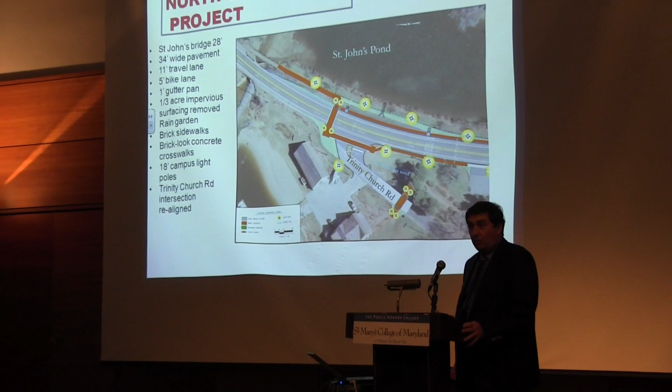Currently, we opened bids in December and had a good array of bidders. WM Davis up in Leonardtown is the low bidder, and we're now just waiting for the State Highway Administration to give us permission to go ahead and award the contract. So this is what we bid, and I'll go through it quickly with you.

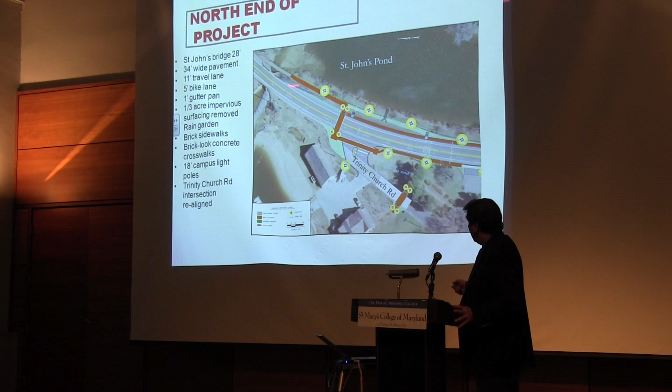This is St. John's Pond and Route 5, where St. John's Pond goes under the road out to the river. And there's the rowing house and the boathouse, River Center.

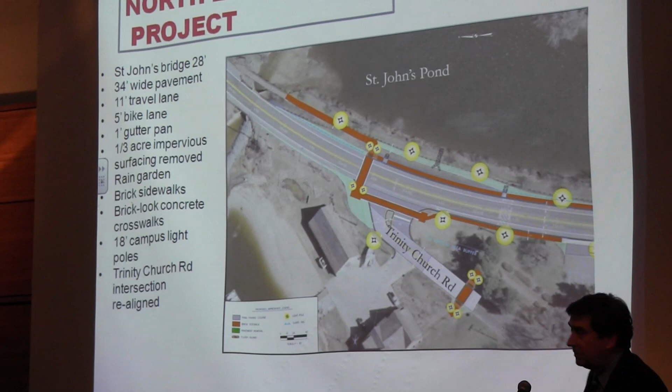We will be moving the existing crosswalk that's down by the statue. That's going to go away completely and move up to this intersection, where people are crossing anyway. We'll have a new sidewalk connecting to our footbridge right here at St. John's Pond, with sidewalks running down both sides of the road.

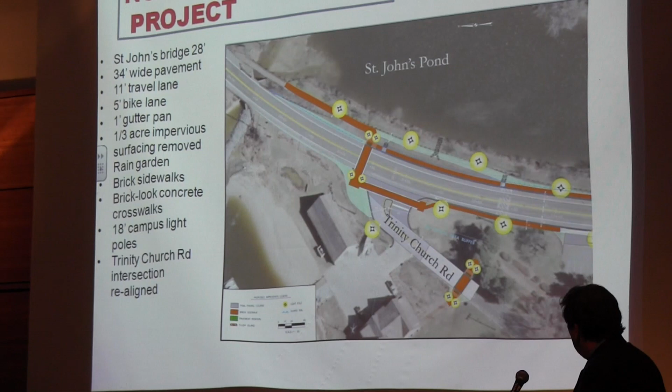The yellow dots are street lights, like our campus standard light poles you see, but taller—about 18 feet and quite a bit brighter. These are designed for streets, not for sidewalks.

Right here, we're going to realign Trinity Church Road. So right now, Trinity Church Road kind of follows where this light green is. If you're coming from the northbound, it's kind of like an exit ramp onto Trinity Church Road. You don't really have to slow down. You can just go whipping down that road at a high rate of speed.

And of course, we have no sidewalks on this road as of yet. We do have plans in the far future to try and do that, but not quite yet. So we're going to realign this road so that it actually turns, and we'll have like a 90-degree intersection. That also will allow cars who want to come down Trinity Church Road to make a right-hand turn safely.

Right now, you're at such an acute angle that if you have a larger vehicle, you're turning into the oncoming lane of traffic to make that turn. So this will eliminate that.

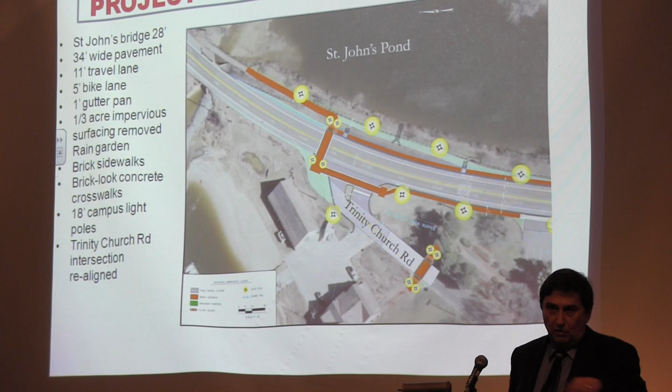There's another crosswalk there, and there's a small mountable island, so it's not a hard curb. A large truck, like a big charter bus, could literally drive on top of that — kind of like you see at the circles, the rotaries in the county, where it's not a hard curb, it's a mountable curb. So the fire department asked for that, and we made sure that they got that.

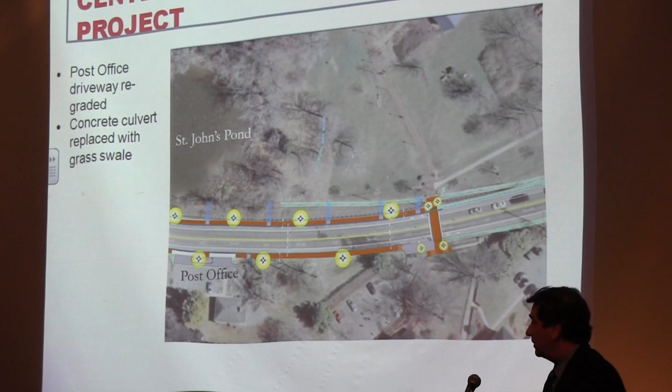And then this is the crosswalk up at the River Center. Right here is the entrance to the post office. So the sidewalk goes across, and it'll all be ADA, with curb cuts and everything, and it continues down to the main crosswalk right here.

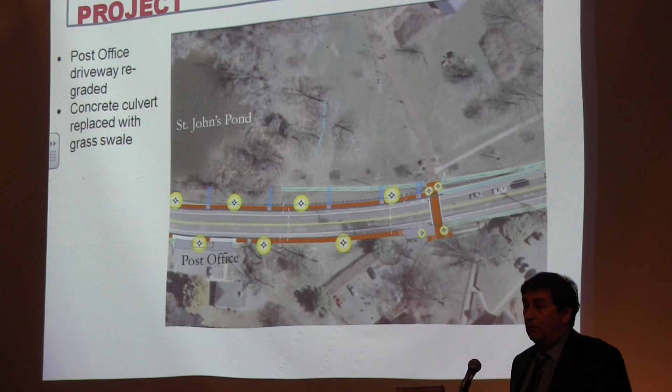Originally we were going to do these with real brick, and SHA said no, that would be too much maintenance. So then we went to stamped concrete, and that was too expensive. So now it's stamped asphalt. It will still look like brick, similar to what's over in Solomon's near the Marine Museum, where it looks like brick, but it's really not.

And the road doesn't narrow, by the way, just so you know. The drivable lanes today are 12 feet wide, and they will remain 12 feet wide. We're not playing with the drivable lanes.

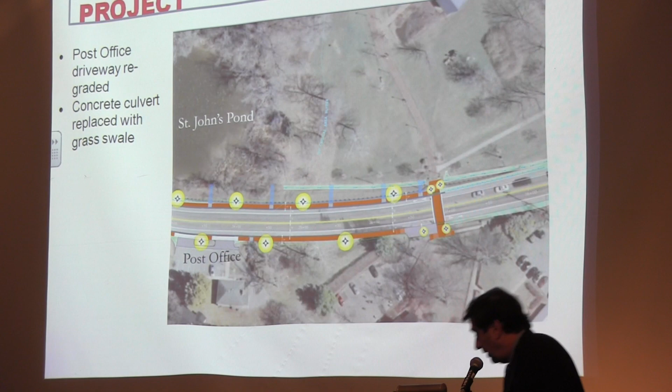The sidewalk goes where the shoulders are now. So you have a 12-foot lane right now and like a 9-foot shoulder. What we'll end up with is a 12-foot lane, a 4-foot bike lane shoulder, and a 5-foot sidewalk with curb. As you go further south past the crosswalk, where it's green, that's where we'll cut the shoulder back some to eliminate some of the hard surface for environmental reasons.

And you know that big giant concrete swale on that side of the road, where if you drove off your car would be like this — that gets filled in and becomes much more... it's still a swale for drainage, but it's not big concrete, it's all grass and it leads down.

And then this is the existing Campus Center Drive, so this is where the project will terminate. And as you've probably seen, and we'll talk about this in a second, the new driveway is going to be up here.

So that's phase one. Does anybody have any questions about phase one before I go to phase two?

Yes, sir. Tell us something about the lights on the road there, the yellow spots. Are they focused downward?

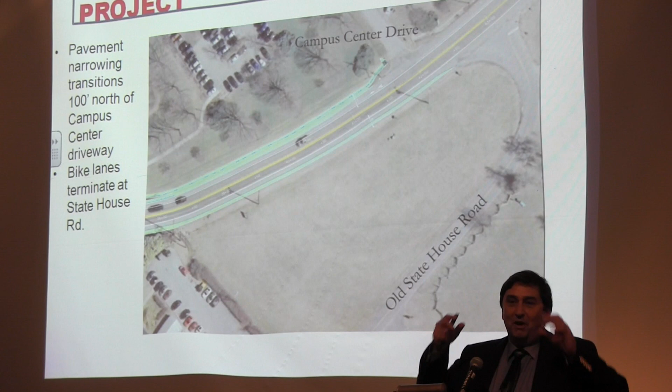Yes, these lights are not the light pollution type lights. There's a cap on top, and the light is high pressure sodium vapor — not the low pressure sodium, which are the bright orange ones. These are the ones SHA typically uses on their highways. They use that particular tint because it provides the highest level of definition. When you go to the really bright white ones — same as people who hunt wearing those yellow glasses, because it gives them better black and white definition — these lights have a slight tint to them, but not that yellow-orange light.

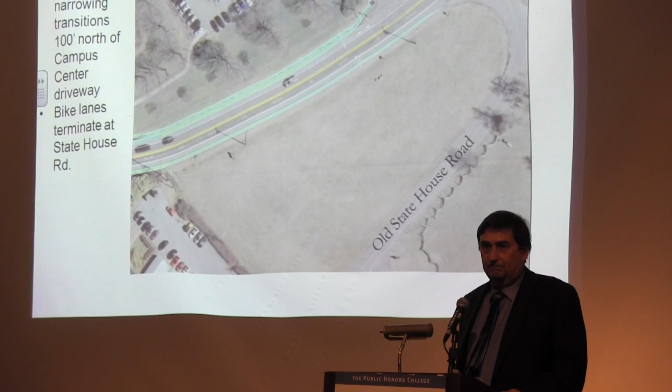Yes, sir, just to clarify — the bike lanes will be taking over the shoulder, is that correct? Yes, whereas now it's approximately a 9-foot wide shoulder, that becomes 4 feet of bike lane and 5 feet of sidewalk.

Why is the Campus Center Drive being moved? Is it to line up with something? Well, we'll go through that. Can I hold off on that until we get to the parking lot, because I'm going to talk about the parking lot.

Any lessons learned why that might have been a concrete culvert to start with, like erosion? Well, probably was, I mean, absolutely. That was built back, don't quote me, like 1930.

When they were having the tricentennial for St. Mary's City, they built a bypass, Trinity Church Road. That was Route 5 through the city of St. Mary's, and they built the bypass, if you can imagine such a thing, around St. Mary's City. In those days, nobody cared about runoff into the rivers and the bays, so they just put in a hard concrete swale, inexpensive construction, served the purpose.

And there's all kinds of, along that road over time, you can see where there are drainage ditches from catching rain, and culverts and other parts of the road, with pipes coming underneath the road that go right into that ditch.

Seems like there's probably a lot of water that runs down that, from Lawrenceville or whatever road, and it's fairly steep there, so would it be causing an erosion problem without the concrete liner? That's what I'm getting at. Yeah, I understand it's more natural to have grass filtering and all that if it's not eroding.

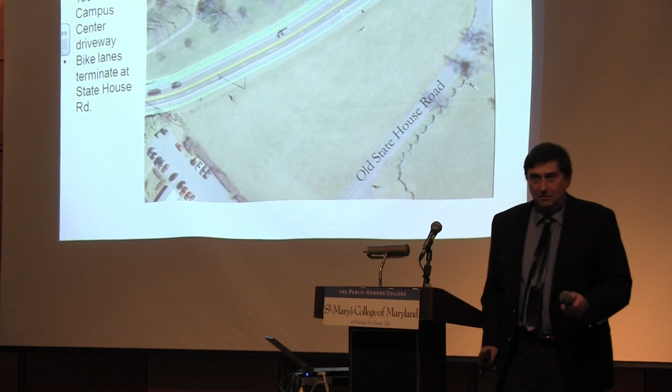Could I just ask the cameraman, can you hear the questions that they're asking? I can hear the questions, but if the microphone could be passed around, that would be ideal. Oh, okay, yeah, I could repeat the question. That would be easier, or Lisa's got a microphone in the back — this is our first time doing this videotaping.

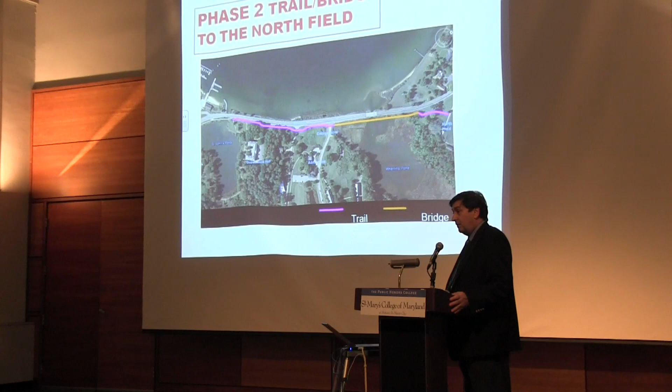Any other questions? I'll go on to phase 2, which is just one slide, but I'm really happy to announce that we applied for and received a grant, a federal grant through State Highway Administration. It's called a Transportation Alternative Program Grant, or TAP grant, to construct the second phase of traffic calming, which is a bicycle pedestrian trail that will go from St. John's Pond all the way up to the North Field, with about a 700-foot bridge that has to cross Fisher's Creek and the marsh area.

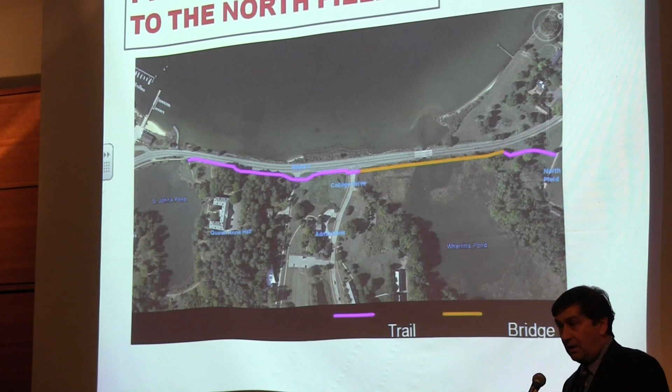Now, this will not have any effect whatsoever in terms of doing anything to the road. We're not touching it — this is all going to be on college property. But our biggest concern is that this whole stretch of road has no pedestrian or bicycle pathways, and right now when you get to this particular box culvert, it's not wide, less than 18 inches. So we have a lot of our students, and me at lunchtime, going up this way and dodging the traffic. So that's the goal here, is to get pedestrians off of that road.

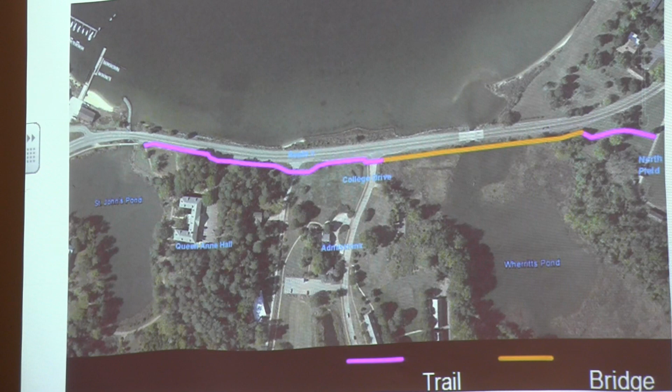So this is a $1.7 million grant, and we have to put a $435,000 match to it, so it's a total of about a $2.2 million project.

Well, the design is already 30% done. We had to do the design to 30% in order to apply for the grant. So we're at that point, and we'll be finishing the design this summer, and then construction we hope to be in the next construction cycle, next spring and summer.

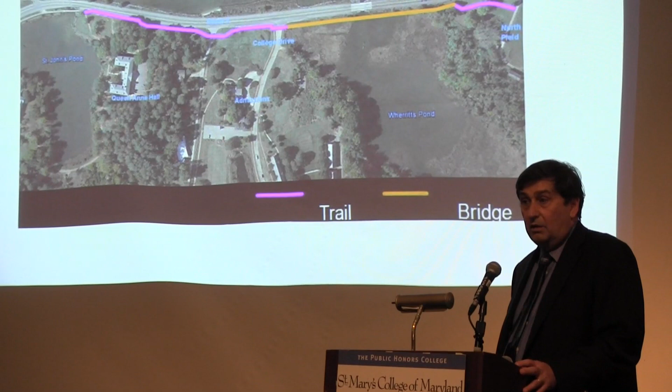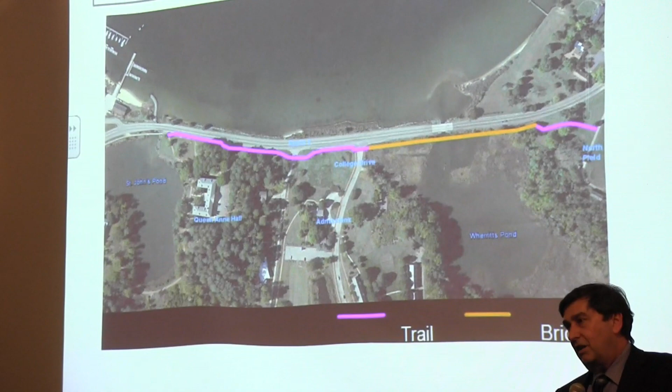Archaeology, we've worked closely with Gina Fodden's group from the city on this. The only place where we're a little concerned about archaeology is up here on the North Field where the old sites are. So we probably will not do this exact path, we'll probably try and come this way. We always try to route our sidewalks in archaeological areas so they're built up on top, where we're not cutting into the ground, so the archaeology underneath is actually protected.

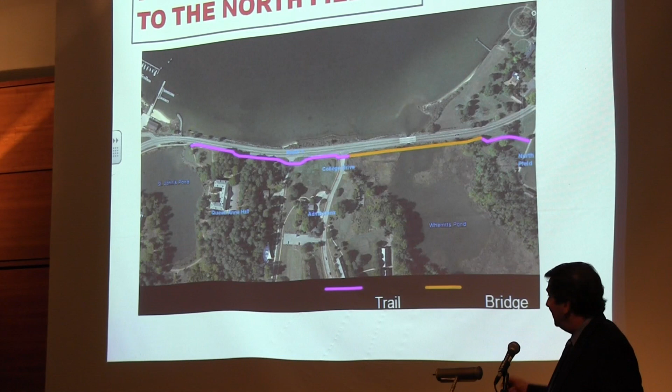Any questions on that? Yes sir, the pedestrian bridge at the traffic bridge, is it the same clearance height underneath? We're not at that level, it'll actually probably be higher, I think because of storm surge. There's another issue we have to consider, which is boat and kayak access. You'll be able to get kayaks, whatever you can get under this culvert, you'll get under that bridge without any problems.

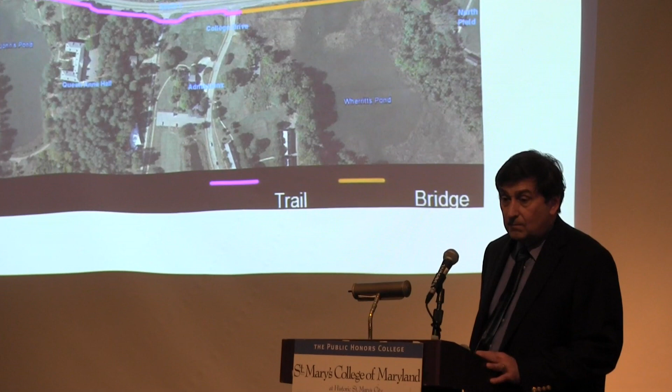So the $1 million federal grant has been used for phase one, and that's already in place. Phase two would be a combination of a state grant and a match. Who's doing the match? It'll come from other than federal funds. The college is prepared to match, and we're looking into seeing if we can do it through state funding.

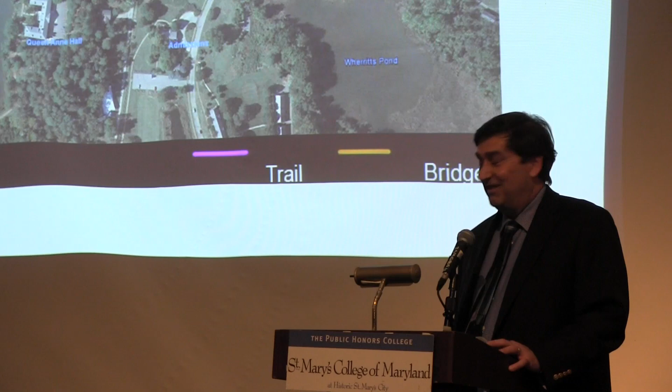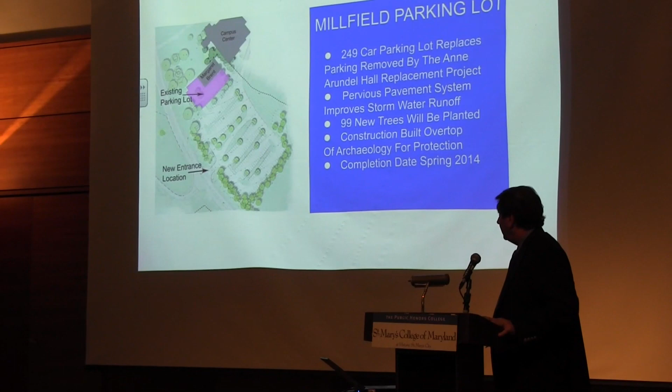Any other questions? Okay, then I'll move to the next project. So this is our Anne Arundel Hall project. The Millfield parking lot is part of the initial phase. We did the parking lot and the demolition of the building. Right now you see this is phase one from this line going this way, so this is all phase one right in here. Then this will be phase two, and this is the existing parking lot that's in purple.

Right now we're just waiting for the weather to break. It's taken a long time, it's all weather at this point, we're just waiting for asphalt to open up. It's not been a kind winter. We've had so many nice winters the last few years, and the winter we picked to do this has not turned out well. So as soon as we get that done, we're ready to go.

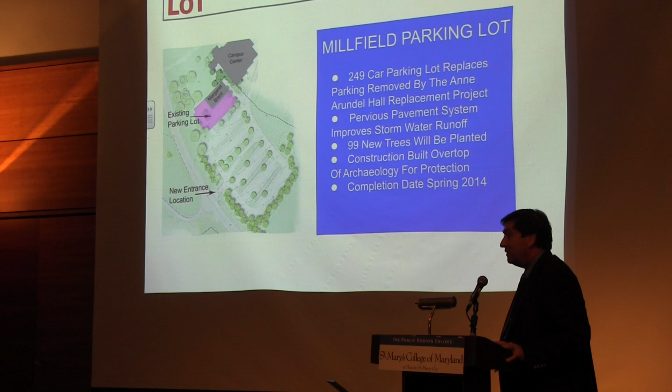This parking lot, now this moves, Ingrid, to your question, the entrance moves to line up with State House Road so that we'll have a true four-way intersection, so you don't have this stagger where right now you have people trying to drive around, people making a left turn, and then somebody making a right turn 50 feet down the road, and it's just not a good setup.

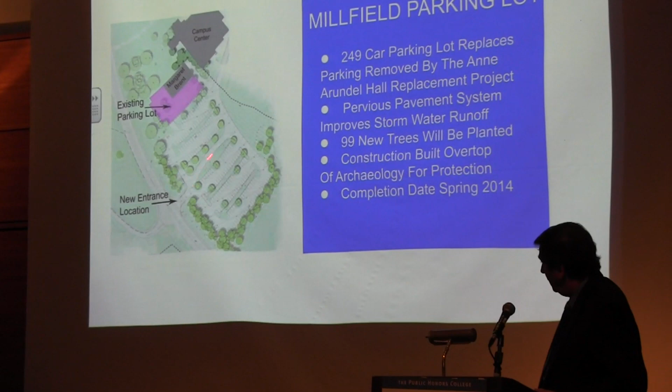This was also designed so that, right now, if you've ever watched our large 18-wheel trucks bringing food to the campus center, they kind of stop in the middle of the road and slowly stop all the traffic and back up down the road. So now they can pull straight in, there's a curve in this part of the driveway, it curves around this way, so they can pull in headwise up to here and then back down into the loading dock from there. So it was designed that way.

So it will be well landscaped with trees around it. The archaeology team has worked closely with us on this, so again, many thanks to St. Mary's City. This is actually on the city's property, this parking lot.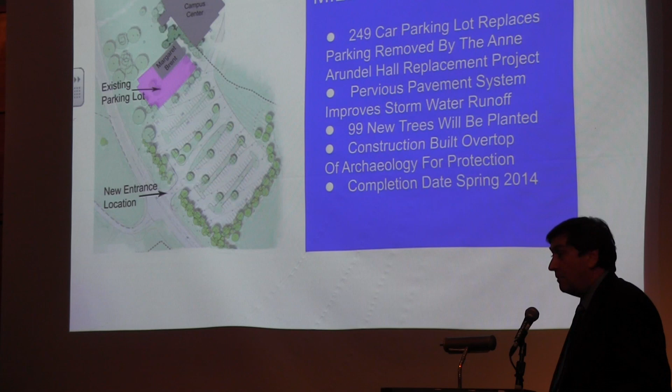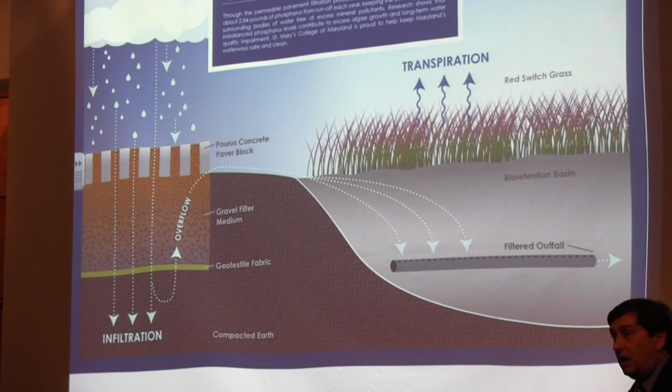And it's a pervious pavement, which means, here's a quick diagram. These are those concrete paver blocks you've seen, they kind of open up and they're filled with gravel. So the rain comes down, and hopefully if it's a light rain, it infiltrates into the ground and Mother Nature does its thing. If it overflows, it runs down, the parking lot slopes down and it will run down into, and it's bisected by...

bioretention swales or basins. So the runoff would run into those swales, which have a special permeable soil in them, so the water goes in, and either through transpiration with the grasses that are there, or through the ground below, it can infiltrate there. If it gets to the point where it's really saturated, it can go out through an outfall pipe, and by now it's filtered water, so it's removed the phosphorus, and you have clean water going into the St. Mary's River shed.

So any questions on our parking lot? What does the geotextile fabric do?

That's there to separate, the city actually asked for that. It doesn't do anything from an engineering standpoint. Water will flow through it, but it was done.

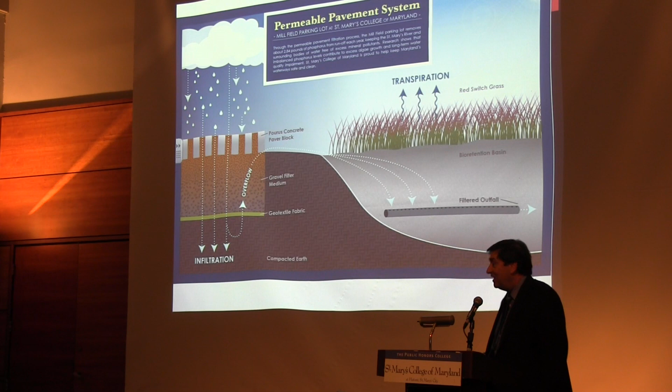This parking lot is unusual if you're in engineering. Normally, if you were going to build a parking lot, you'd go out there and strip off all the topsoil and top layers of dirt to get good soil, and then you'd build. Well, that would get into the archaeology. So we went out there, and other than giving it a good haircut, mowing the grass way down, we put the geotextile fabric right on top of the dirt and built.

It also helps keep this special medium, the filter, where it belongs, so it's not sinking in if you have soft spots.

Was it to identify the layers where the fill stopped on this project? Was that part of the textile? I believe so. The archaeologists asked for it, I think, so they can tell in the future. It's pretty obvious whether they had it or not, because this is obviously imported material. When they're out there, it's amazing how they can look at the earth - to me it looks like dirt, but they look at it and it's like, oh no, that's 300-year-old dirt versus 50-year-old dirt.

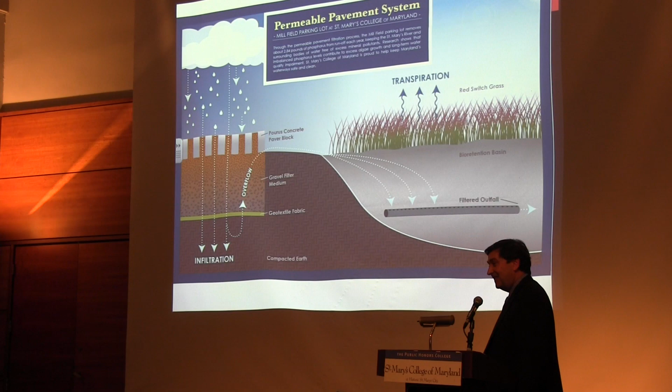Okay, the building is moving along. So this is the building, and maybe you've seen it in the past, but this is what we're going to be building starting this summer. So it's Anne Arundel Hall. It's in 3 buildings - right now it's the south, the west, and the north building. And the Blackstone Room is this nice little 2-story space right here.

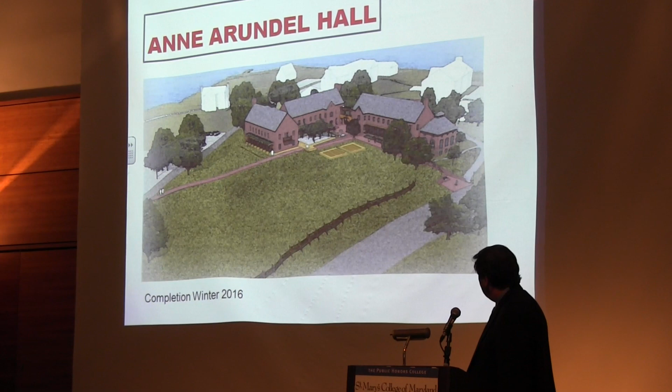You remember the old herb garden that was in Anne Arundel Hall? That's right there. And the Ladies Garden Club has already volunteered to help us get that planted and take care of it.

Right now, construction has gone through the demolition phase, and we're in a planned hiatus, so the archaeologists could go under into what was the crawl space of the building to do archaeology. Ruth Mitchell's team is doing a super great job - they've found, she told me today, more things than they ever expected to find in that crawl space.

They've confirmed clearly where Middle Street was. You're not going to find Middle Street because it was obviously on top and is long gone, but they've found the ditch line, so it confirms exactly what they thought. They've found buildings that were along it where there are no buildings left, but you can locate the foundation post holes of the timbers that made it up.

So they've done a great job of that, and they'll be out of there in the late spring, at which point we will finish tearing down and excavating the basement, and we'll start driving. There are a lot of piles that go on this building - we'll be drilling augured piles in there. So we'll start that construction and the utility work this summer.

Any questions about Anne Arundel Hall? Yes? So there will be classrooms? Yes, okay, that's a very good question.

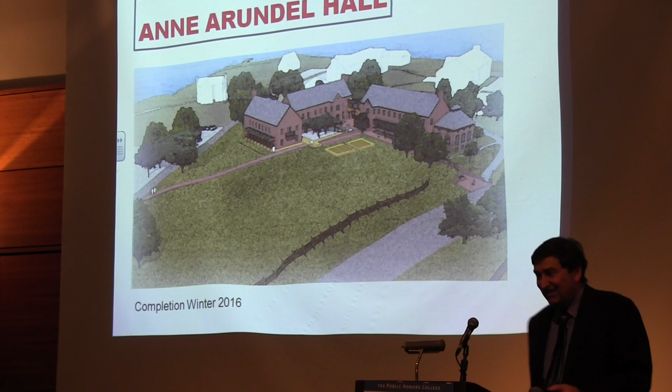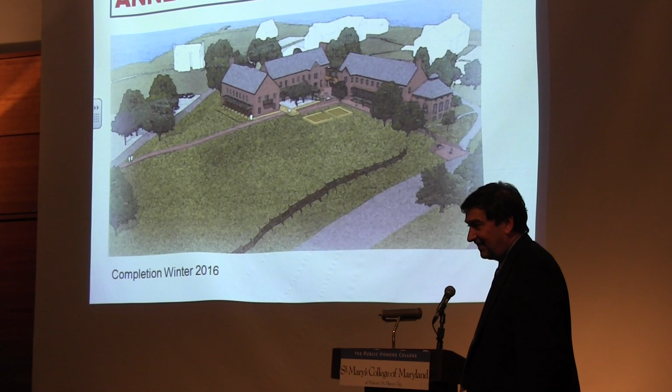Turn screen. There's a button. There should be a rubber button. Technical time.

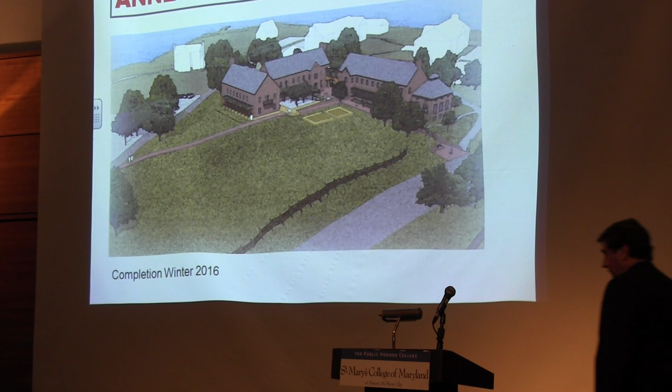So, no, the plan has always been for the campus to maintain a robust part of our academic program on the historic side of campus. Kent Hall has our history and social sciences - history, sociology, economics, and political science programs are in Kent Hall. They'll remain there. We've always wanted to have 15 to 20% of our academic program on the historic campus because that's our roots, that's where we started, and we really don't want to abandon the program on that side.

So right now, this building is scheduled for completion in the winter of 2016. We'll move our faculty in there over the summer after classes get out in the spring. Any questions about Anne Arundel Hall?

Yes, sir. Oh yes, that's another great point. So besides, yes, this is targeted - of course you don't get it until they finish the building and LEED does their certification. But the architects know what it's going to be, so it's going to be LEED Gold. We're not too far from LEED Platinum. We actually have, it's not shown in this rendering, but we have a bank of a little less than 20 kW solar array that will go on that roof.

It's heated with a geothermal heat pump system is how we're heating. We're not using hot water oil boilers. Any other questions about it?

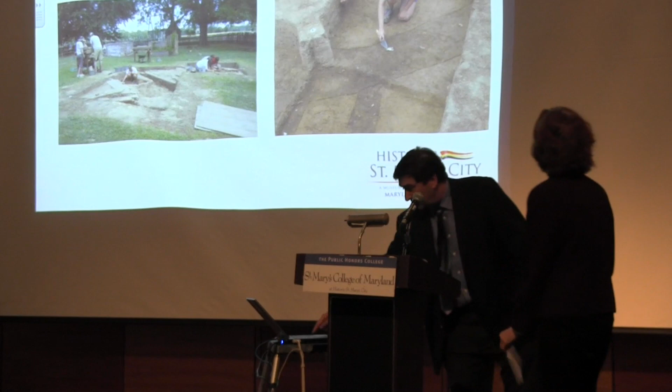Thank you, Dan. So I'm Regina Faden, Executive Director, Historic St. Mary's City. So one of the projects, we were very pleased to see that we had 2 capital projects on the governor's 5-year capital improvement plan. We had the Interpretive Center, and that fell off during the economic downturn, and now it's back. And we have the Leonard Calvert House, which is something that, probably 15 years ago, Chip, the Maryland Heritage Project was developed as a capital program shared by the city and the college. The college had 8 buildings that came along under that, the city had 8 buildings that came along, and then the Anne Arundel Project was a shared facility.

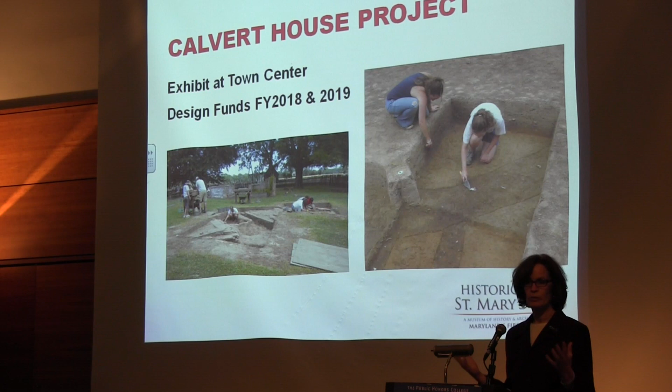So in all, for many of you who've been here a long time, you've seen the tremendous growth that's happened. The Calvert House is something that's been part of that plan for about 15 years. We have one portion of the program design which tells us what we want to do there, and then we'll get into the second part of the program where the state starts to fund something - that's when they say okay, now break it down and figure out what it's going to cost.

But anyways, the exhibit - if you've been by the field school the last few years when they've been out there during May, June, and July, they've been digging at the Calvert House. So this is the house of Leonard Calvert. This is a place where the Act Concerning Religion was passed, where Margaret Brent saved the colony. I mean, it's a number of really significant events in the story of St. Mary's City. And so the exhibit is going to be something like St. John's.

It's going to look like a colonial building on the outside, but it's going to be a modern exhibit building on the inside. So if you follow the news recently, we found the foundations of the 17th century building. We found fence lines, we found all sorts of things. It's been a very interesting site because the Brome-Howard - any of you who've been here in the community - wow, this is where that used to sit.

What was good in the 17th century was also good in the 19th century. So this is a sketch. The Leonard Calvert House was 70 by 40 feet, and so it was a very significant building.

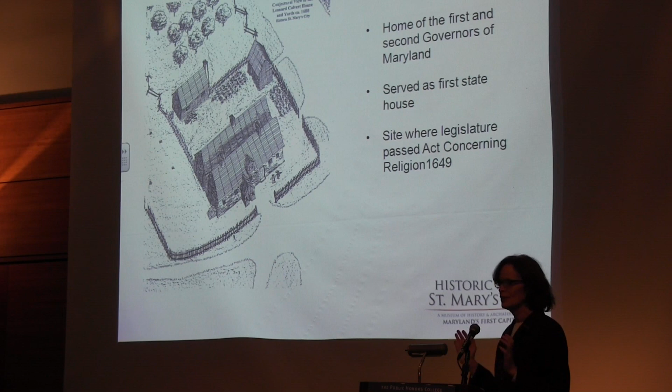Henry jokes and says, well, it was the first double wide in Maryland. We don't know, as far as we know.

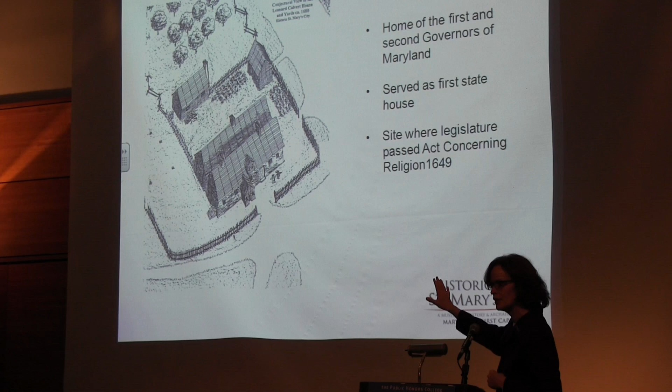Anyway, so this is a rendering that was done some time ago, and there are probably more fences that we found and other things, but this is a general idea of what that house looked like. And we have some outbuildings as well, but right now we're just talking about the main building itself. So again, some of the things that happened there.

And then we also know, of course, when the English Civil War happened, that there was a fort built around that. I don't think we'll recreate that, but we'll tell that story there.

That's one of the things that's coming along, very exciting. It will complete the town center, so we have Cordea's Hope, we have the Ordinary, and then we'll have the Calvert House, and that's really where we can tell some fascinating stories about the development of the colony.

So Chancellor's Point, when I arrived here a little over 5 years ago, and many of you who've been in the community know, it was a little run down, but you can see it's a beautiful 66-acre site right there on the St. Mary's River, and you can look across to Virginia. It's right on our walking trails.

Really, what had been neglected, unfortunately, was what used to be a nature center in the 1980s. And with the generosity and help of the college, the Chancellor's Point Club, and volunteers from the community, we have put the walls back. We have windows in there now in the nature center. We have painted it, it is buttoned up. It is no longer home for snakes and raccoons and other things like that. Someday we're planning it will be like a study center, an open space that people can go down and use for meetings.

And when we were developing the idea, first Maggie O'Brien said, I love this site, I'm leaving the college now, there's something I would like to do down there. I have a student who's interested in helping and working with you, and we have a little bit of funds that we can put towards it, and we've made good use of those funds.

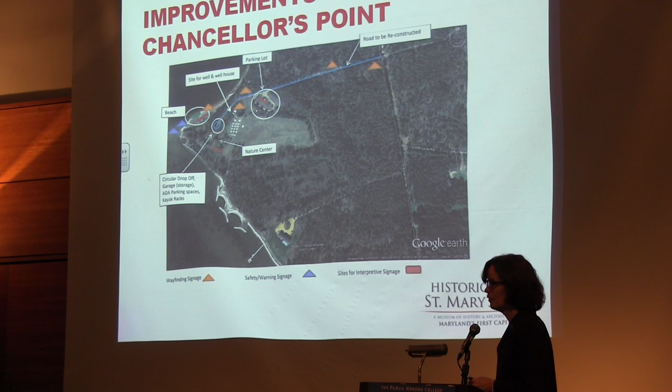It'll be wonderful to have an opening at Chancellor's Point, to come down and enjoy it, because we know the river is getting closed off more and more for people. So we'll have that open and available to people. That's very exciting.

Right now, what's going on is Ruth Mitchell and all the archaeologists are out there doing the mitigation, the excavation. They're doing everything involved with not only the Anne Arundel project but also the Interpretive Center. All the infrastructure is going in. The college really helped move that into the Anne Arundel project, in the hopes that the Interpretive Center would come along. So it's sort of worked out that way.

So the purpose of the Interpretive Center, for anybody who hasn't heard about this in a while, it's really a welcome center. It's going to be a 7-day-a-week facility. That's what we're really excited about. We close our living history exhibits for 3 months out of the year—we can't justify keeping people out there in January because it's just a little too brutal. But this will be a wonderful 4,000 square foot, relatively permanent exhibit so that people can come year-round, hopefully 7 days a week, to get an idea of what's going on at historic St. Mary's City.

And then the orientation also to the college, talking to people about what this place is and who lives here. Also, it completes the entire plan that we have with Anne Arundel Hall.

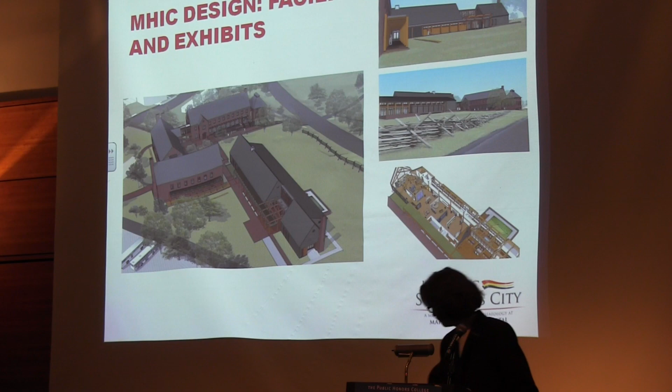That's perfectly fine. I forgot to ask for questions—does anybody have any questions about Chancellor's Point?

It's been a while since I've been down there. If I were to go down there tomorrow, can I drive? No, we've been trying to be careful with Chancellor's Point. You can drive to the entrance and the access road, and then you walk down. Frankly, we've been a little shy since the reason it was falling apart was someone drove a truck into the building when no one was down there, almost 20 years ago.

So we're trying to figure out how to do that. Even one of the students had a good idea—said maybe you put a gate down at the parking lot, and then you allow people to drive that far. We have to figure out how we're comfortable monitoring that, because once we put public money into it, we want to make sure it's taken care of. But yes, you could go down there tomorrow, park at the beginning, and walk.

Absolutely, and that's one of the things we've been thinking about too when we do the road reconstruction. I don't know how State Highways feels about this, but whether we could create a parking space down at the entrance, I have no idea if that's possible. But ultimately, we do want to have it open and available, at least on 4-day weekends or something, for people to get in there.

That's the point of it. The Park Service said if we're putting money into it, you need to make sure it's available to people. So we do want to figure that out. Anybody else have a question about Chancellor's Point?

Camping? Yes, there'll be camping down there. The public parks get extremely crowded, like Point Lookout on holidays, and I don't know if we want this to turn into a massive destination. Well, people have to reserve it.

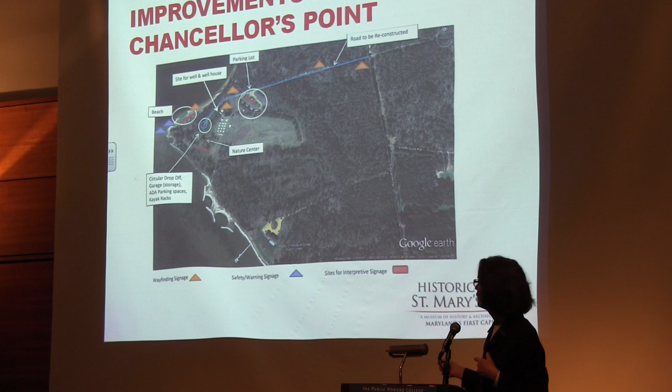This is a very difficult area to develop anything. So when we're talking about a parking lot, all I'm trying to do is make the existing parking lot more stable. There are sort of recycled rubber materials you can get that almost lay down like a carpet, and it has minimal impact. Maybe there's something even better than when I wrote this grant. You put a couple inches of gravel, like I said that's already a parking lot, and then you put that rubberized paver on top of it, so people can get out and be stable on the ground. And it's pervious, whichever the good one is, pervious.

So does that make sense? So they said.

Yeah, I guess I just want to say I like the idea you mentioned of parking up by the road and having another kind of bus or something to take people down so they can appreciate it rather than penetrating the area with a lot of cars.

Right, because it's such a beautiful area, and I've walked that path so many times in my life, and it's just wonderful. I don't particularly want to, you know what I'm saying. Oh, absolutely, Fred. So leave it sort of as it is and get rid of the parking lots, plant grass or trees or bushes, and keep them out by the road. Bring them in by buses if they're handicapped. But I think it's something you really should stress. This is a walking area for people. It's just what I feel.

Okay, well, I mean, if we're talking about large groups, certainly we would have to bus them in. There isn't enough parking that I've proposed to the National Park Service, it's 20 spaces, that's all. And if we were to have a big event down there, I'm talking about a Chautauqua, the type of things people in this community like, we would have to be busing them in. There isn't adequate parking down there for a big deal.

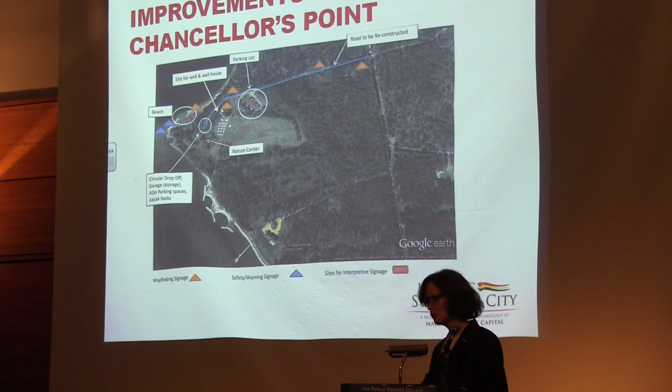Okay, then I skipped over to the Interpretive Center. Any questions about the Interpretive Center? This is really a dream come true for us, especially the portion of Anne Arundel Hall where we get all our bits and pieces, as Silas says, over into a really state-of-the-art facility. It's going to be wonderful, great gains for the museum.

Just a question, not about the center per se, but a few years ago there was, at the top of the road, a farmer's market or tailgate market, small. It was at the intersection of Route 5. Is there any desire to encourage that, bring that back?

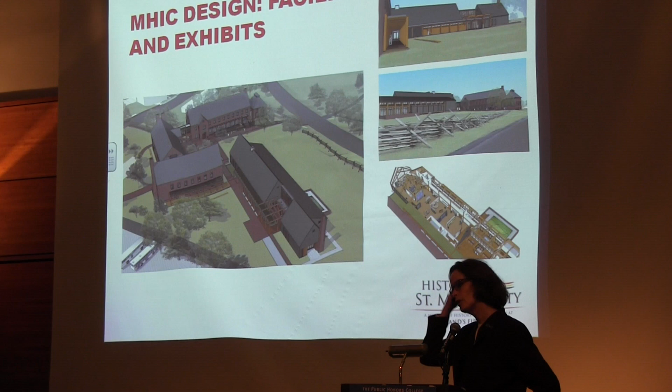Well, we did one last year. It's run by our volunteer, Mary Alves, who was our landscape curator before. She ran that with the volunteers, the garden market. Last year we might have made a different choice - we put it in front of the State House because some of our volunteers had a really wonderful exhibit of textiles and quilting and other things, so we made it part art exhibit, part garden market.

But we are doing it again, and I'm not sure if we're putting it right back on Route 5, but we know we missed an opportunity by not putting the sign out because everybody's used to seeing it, right around Mother's Day - that's what really drives a lot of the market, to make sure it's close to Mother's Day. So it's on our calendar, the week before Mother's Day.

But we are like a farmer's market - they used to sell some food on the corner a few years ago. They did it every Friday during the river concerts, or before the river concerts. This farmer's market would be over there selling vegetables and fresh baked goods, and then you'd go to the river concert. That was a few years ago - maybe not in my time.

Do you remember that, Chip? Okay, I can look into it. It was pretty popular. I'm not sure who ran it, but I'd be happy to look into it.

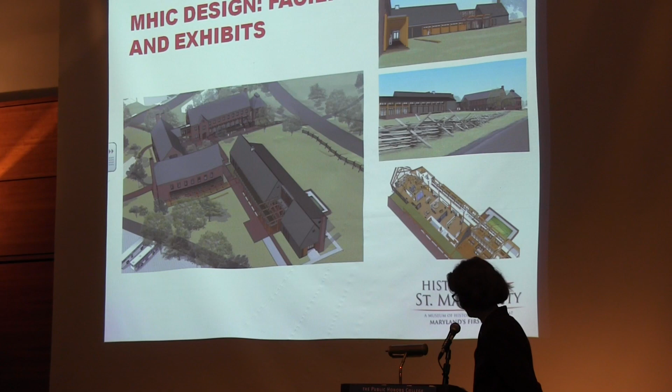So if there are no more questions about any of the projects - yes. I had, a couple years ago, there were some exhibits here at the college that were Smithsonian Museum based. Is there any thought to having that as part of the exhibits in the new interpretive hall?

Well, the Between Fences exhibit that came - yeah, we did that together. I did an art project with some of the schools that was part of that. That was a partnership, over in the Boyden Gallery. It's a wonderful exhibit, we had that at the museum I was at before. So it's a competitive thing.

They go through the state humanities councils, and there's one out now about music. That Between Fences one seemed very good for us to talk about land use and all that kind of thing. So that type of thing comes along once in a while, and it's a competitive thing.

In order to get Smithsonian exhibits like what they have over at Annmarie Garden, you get that if you're an affiliate of the Smithsonian. I haven't looked that deeply into it. We have so many things nobody's even seen from St. Mary's City, but that could go into the temporary galleries. There's a fee associated with that, but also a lot of benefits that come with the Smithsonian affiliation, so it's something we just haven't had a chance to look into.

But I walked around Annmarie Garden and thought, wow, I can see the great benefit of having all those wonderful sculptures and pieces and the access they have to training and programs and all that. So it's a good idea to look into anyway.

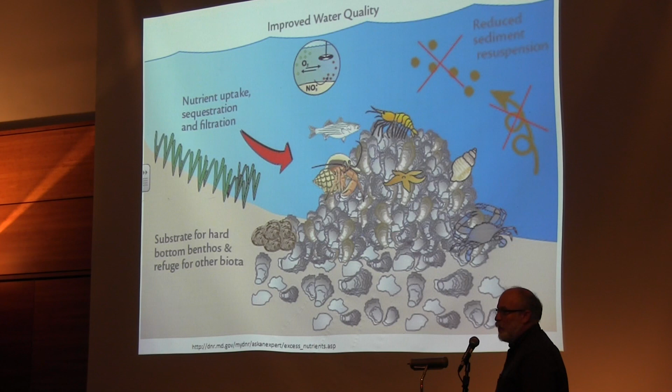But when we talk about oysters, maybe I need to go back a little bit and say, well, why oysters? So I stole these slides from Drs. Tanner and Paul, who did a presentation on this not long ago, so I give thanks to them tonight. They're not here, and if you don't tell them, then I won't get in trouble.

But oysters—the Chesapeake Bay was full of oyster reefs. They're three-dimensional structures that grew up from the bottom, especially down the south part of the bay. They were referred to by the colonists who sailed in the waters as rocks, and they frequently went aground on them, and many a vessel was lost. These reefs, these rocks, are unique ecosystems that support a diversity of animals and provide services to the Chesapeake Bay that make it a unique estuary, believed by many scientists to be one of the most productive estuaries in the world per acre.

So, of course, they provide for nutrient uptake and sequestration, as I call it—a bad word these days, I guess they didn't realize that—and filtration. They filter the water, taking the suspended solids out of the water column, clarifying the water, and allowing light to penetrate so the grasses can grow on the bottom. They also provide unique, complex habitat that invites in other species, particularly the young of the species, and protects them from predation.

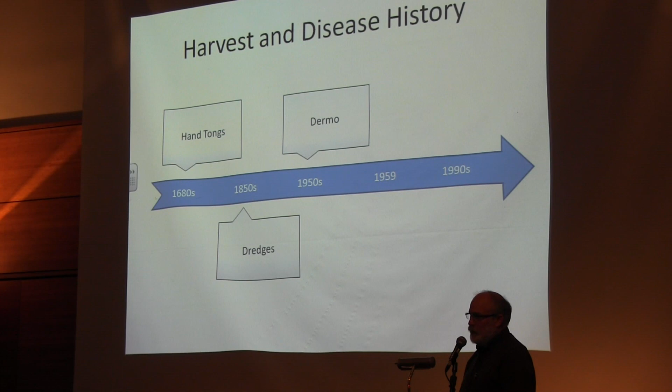So I give you a timeline here. Hand tongs in the 1680s, then dredges came along so we could scoop them up at 4 and 5 times the rate. Then in the 1950s, dermo disease was introduced—a Pacific disease from the coast of China, beginning in the Gulf of Mexico. In '59, MSX was first detected, again another Asian Pacific disease. I believe that one started more in the northern waters and worked its way south. I think it was first detected off the coast of New Jersey.

And then in the 1990s, we see this major population crash, for a variety of reasons. Here we look at the harvest. I kept a couple of these slides because I think they're kind of shocking if you haven't seen them before, but I'm going to skip through them pretty fast. You can see here how the harvest levels go down very, very quickly.

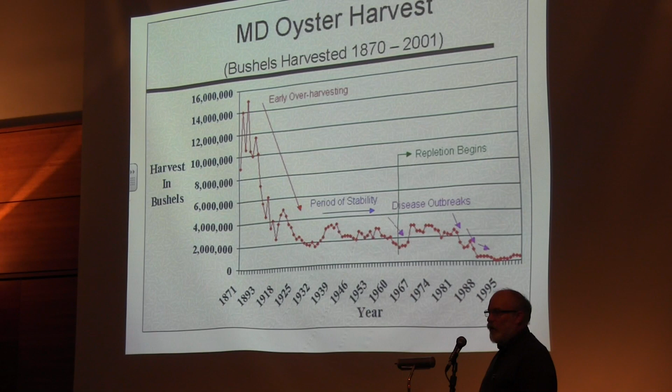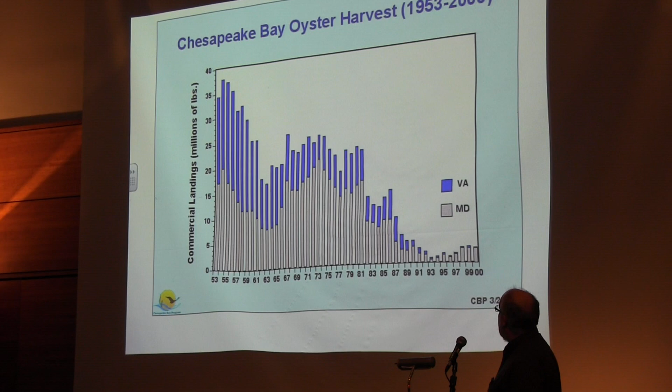And I should note that throughout time, we get better and better at harvesting these things, especially from the 1970s on, when we get major electronics to locate natural resources and extract them. This looks more recently, 1953 on, both at Virginia and Maryland, and again we see the collapse in harvest levels.

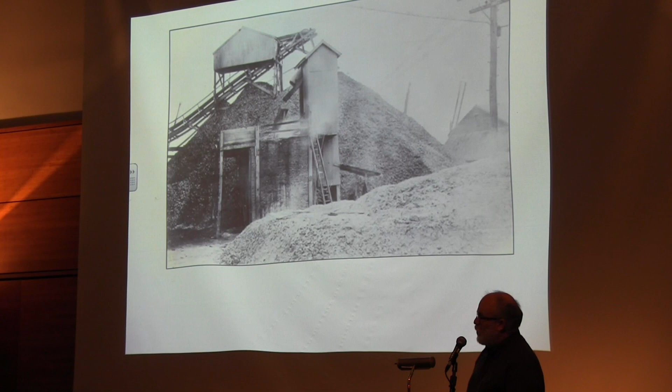That one is Crisfield, Maryland. Again, that's getting toward the close of winter, probably a March picture. And again, that's just one year's worth of shell.

So what are the consequences of losing the oysters? Pollution is no longer abated. We don't have the filtering, the sequestration of the nutrients. We have more sediments clouding the water column. The grasses can't grow. The oysters don't survive, they get smothered under the silts. We have harvesting pressures, we lose the structures, we lose the reefs. The oysters are down in the bottom.

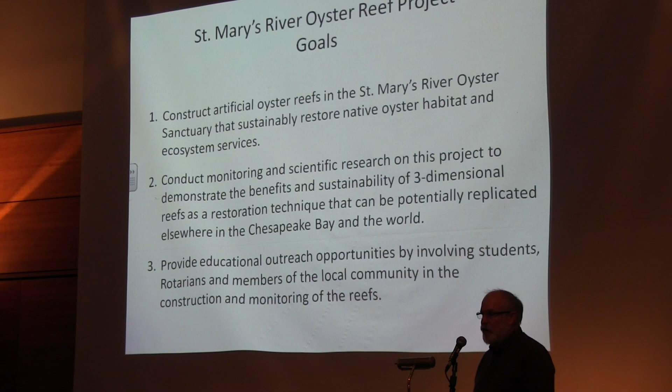So our goals here of building an oyster restoration project - and I stole this from Drs. Tanner and Paul, I think I would have said some of this a little differently - are basically for ecological reasons: to bring back the ecology of the oyster reef ecosystem, to have a living classroom, a place where we can monitor and study oysters, experiment with different restoration practices and see what works and what doesn't, and to provide outreach opportunities to educate the public and get them involved, to personalize our natural environment and reconnect people with their natural world. That's important for the generation that's only slightly represented here tonight. We have two young people, and the rest of us all have some connection to the natural world, but a lot of children today do not.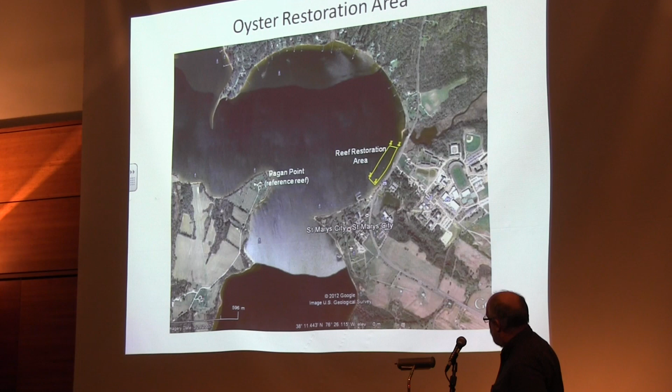This is a look at the Tanner Paul design of our project. State Route 5 goes right along here, very close to the water, and Campus Drive would be right about here. We have different colors here - we're building 3 rows of 3-dimensional structures. These structures are built very tall, to 1 foot from mean low water. Some of these structures are 6 or 7 feet tall.

The different colors represent different type structures and different treatments. We have two types of structure - one is concrete rubble, and the other is made of reef balls that are stacked. Then we have 3 different treatments: one is actually no treatment, to do nothing with them and just see how the natural strike is on the concrete products. Then we have treatment of oyster shell only. And another treatment where we actually put down oyster shell that has baby oyster spat struck on them.

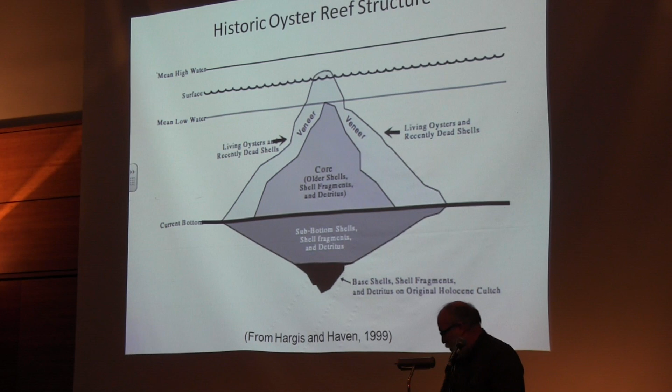This is a diagram from Hargis and Haven of what they believe the historic oyster reefs looked like, that actually came to the surface of the water and formed what they call these rocks. So you have this old core of dead oysters, and then live oysters on top in more like a veneer. We took that diagram, and we're making our core out of the concrete rubble or the stacked reef balls, and then we put the veneer, or the various treatments, on the outside - or in the case of no treatment, we hope that the natural oyster grows.

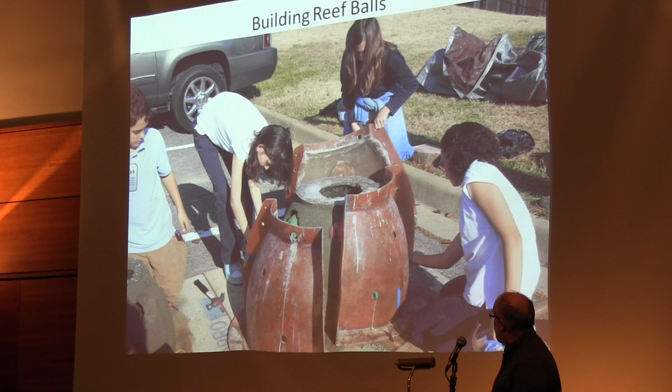So of course, for outreach, we've got to build these products, trying to do it as economically as we can. This is a charter school - I believe they call themselves the Environmental Club - a variety of different ages, making reef balls. This is up at Shadyside. This is a Rotary Project Day, building reef balls 30 at a time.

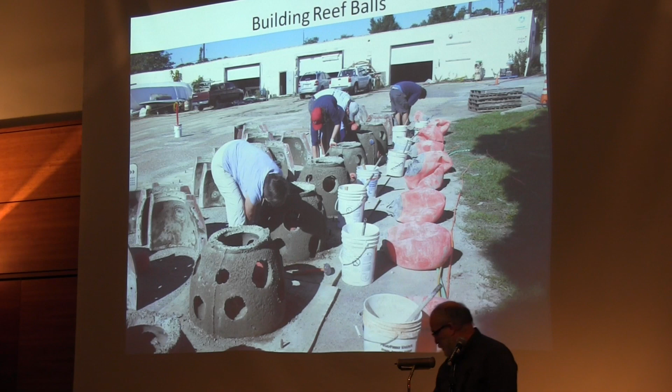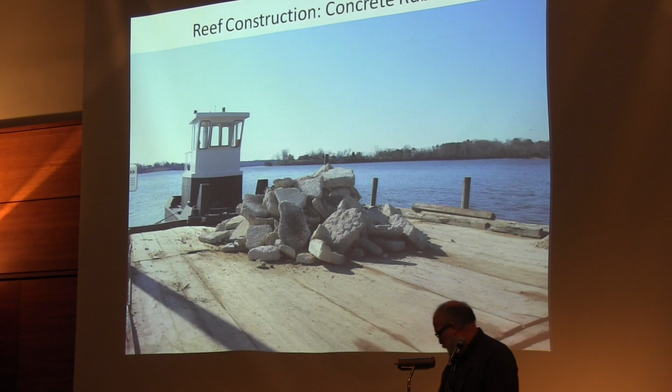Again, the contractor out on the river - I'm sure many of you drove by and saw them out there. I see the heads nodding.

Martin putting a reef ball in the river. This is a shot I thank Chris Tanner for this photograph. This wasn't in his set of slides, and it should have been.

We got out there one day, I think this was March a year ago, and the water was clear. We got this shot - this is 5 feet of water. Those reef balls reach 2 feet tall, and they're stacked 2 layers high. So what we can see there are 12 reef balls, but underneath them is another 19 that are supporting them. You can see there's a lot of interstitial space, both inside the reef balls and in between them.

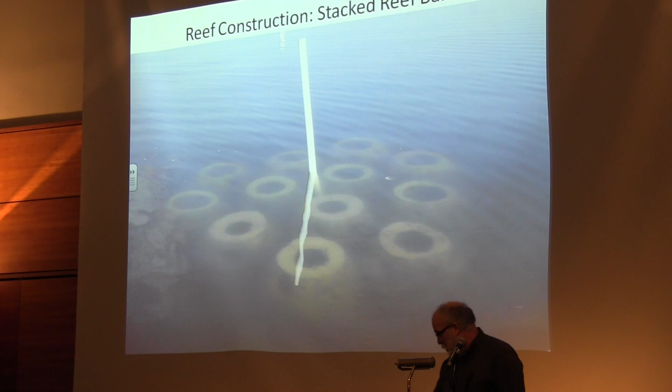That's kind of the stacked reef ball structures.

Here's our oyster nursery. We've had it at the St. Mary's College waterfront for 2 summers now. This big blue tank - people ask me, what's the blue tank? I always say it's an oyster jacuzzi. We fill the tank with 100 bushels of shell, just oyster shell, clean shell.

Then we introduce larvae we purchased from the state hatchery in Horn Point. We introduced 2.5 million larvae at one time. That's the darkness in the water - it looks like muddy water. Actually, 2.5 million is about a big tablespoon of what looks like coffee grounds, and it actually comes in a coffee filter. And it costs a lot of money for that - it's like $550.

This is my program director, Allison Regilla. She's currently a senior here at St. Mary's College. She's describing the project to the students behind her in the Ecosystems of Coastal Ecology class, I believe it's called.

This is the college Rotaract Club. They're out on the river. I believe this particular day they were applying a veneer of just shell. Some days it kind of looks the same, and they're applying spat-on shell - the spat-on shell that we raised in that nursery right down there at the college waterfront. And we support...

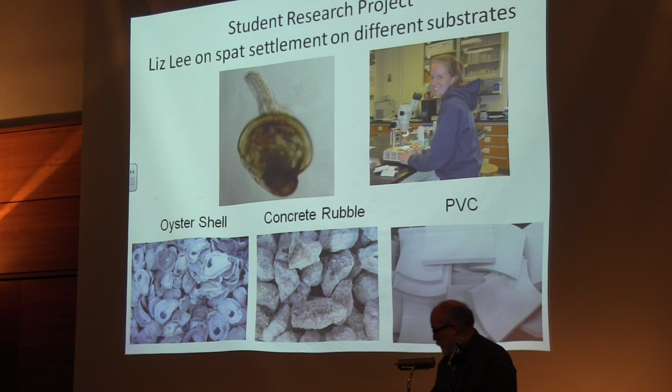college research projects and high school student research projects. This is Liz Lee - she's looking at settlement on different substrates. She's got some graphs to show what she found.

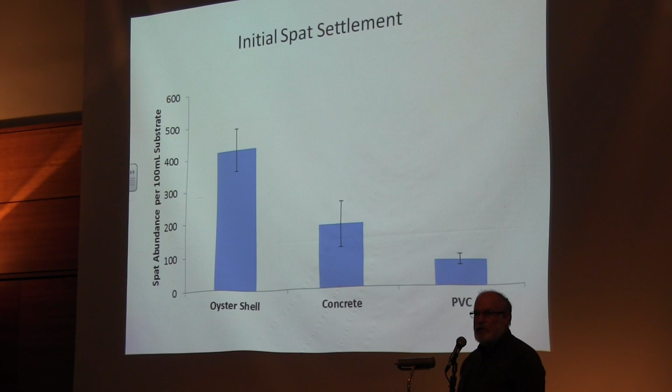You can see here that the larger bar indicates that the oyster shell was the preferred substrate for the strike. Concrete came in about halfway, and PVC, which is plastic pipe, they still like it and they sat on it - it's amazing, but not as much.

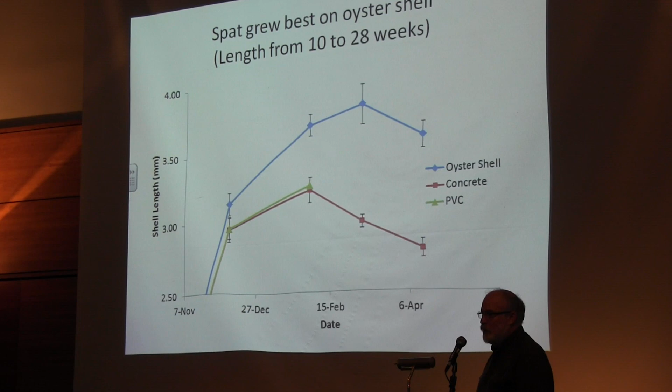But then what was interesting, she looked at the survival over time. So this is the beginning of the mortality rates, and here's another graph looking at it over time. You can see that the oysters grow much faster on the oyster shell. I'm not sure why that is, but we do this experiment over and over again, and if we keep getting the same results, I guess we got to believe it, right?

You know, oyster shell is a hard commodity to come by, and it's very expensive. We're paying $3 a bushel for it. Those mountains of oyster shell get put out in the river for restoration and also for aquaculture, and you don't see mountains like that anymore. And if you do, the people who own them are like gold hoarders - they won't let them loose.

Here's another student project, Hannah Coe. She's looking at the colonization in the oyster reef materials, particularly looking at the diversity. Here's some of her project.

Unfortunately, she did most of her project near shore, and a big blow came along - I think we called it the remnants of a tropical storm - and it blew her project ashore. But she did collect data up to that point.

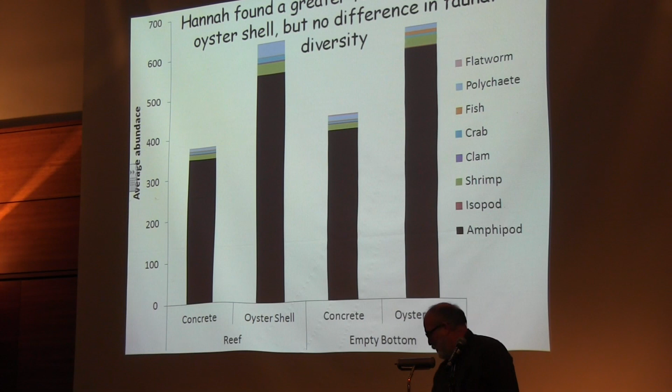I was going to look up what amphipods are because we're talking about them, but I forgot to, and I'm not a scientist. So we'll take them out, look at it without that, and we can see that there's quite a variety of animals, and they certainly prefer the oyster shell over just the concrete.

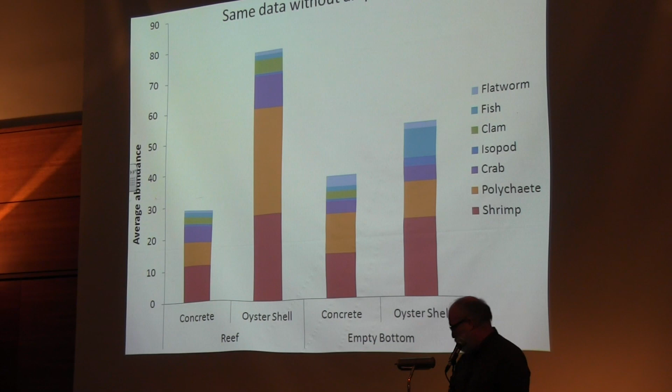So, outcomes - looking back over just a little more than a year, so far we've constructed 11 concrete rubble reefs, treated 4 of those with shell veneer and 4 with spat-on shell. We've constructed 17 reef ball mounds with similar treatments. We have 4 reef ball mounds currently reserved for an in situ experimentation this coming summer - I'll talk more about that.

We planted control areas, about 1.2 acres, exactly adjacent to the reef structures. Again, our control areas are the typical restoration practices throughout Maryland for the last 30 years.

So we can make comparisons, see whether one is better than the other. We already have our hypothesis, and I think what we're seeing out there is that the 3-dimensional structures are definitely better. They cost more, though. We raised 14 million spat in our nursery at the college waterfront, and of course we planted them all in the river.

We have the Marylanders Grow Oysters project, and there are several of you here in the room, at least 3 in our program. They host cages of oysters at their piers, steward them through the first 10 months of their life, which is the most vulnerable part. And then when we introduce them into the river, they have a higher survivability.

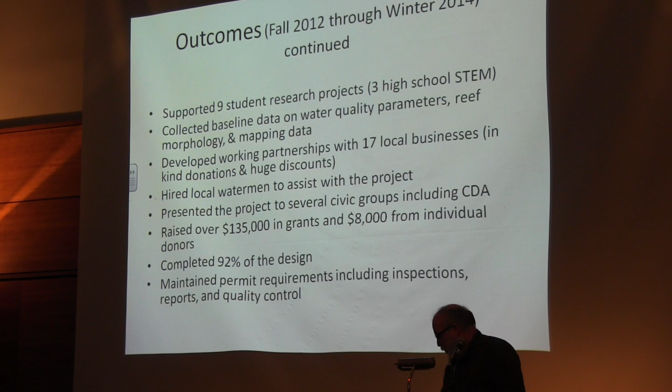At this point, we have completed 92% of the design, and of course we maintain all our permit requirements and reporting requirements on grants. So looking ahead, we're going to complete the last of the reefs and the treatments.

We're going to implement the in-situ experimentation this summer. This was funded through a Maryland Industrial Partnerships grant. The college wrote for that grant and got it in partnership with Shore Thing Shellfish and the Watershed Association.

I wanted to come up with a slide for this, and I know they had photos, but nobody answered an email for 2 weeks, and I'm not sure why. A couple phone calls, too, I couldn't get returned. So I have a feeling the people at Shore Thing that I need to talk to are probably vacationing in Arizona. That seems to be where they like to go, so maybe they have family there.

What we do is take a 10-foot cylinder—10 feet wide, 10 feet tall, open at the top and bottom—and set it in the river in about 5 feet of water. Inside of it we'll have reef ball structures, and then we introduce the larva right in the tank. So we strike the oysters in the river, in situ.

They started this experimentation last year in St. George Creek, and this is a follow-on this year to try it in different areas. They originally looked at it for the purpose of aquaculture, and we want to look at this for the purposes of restoration.

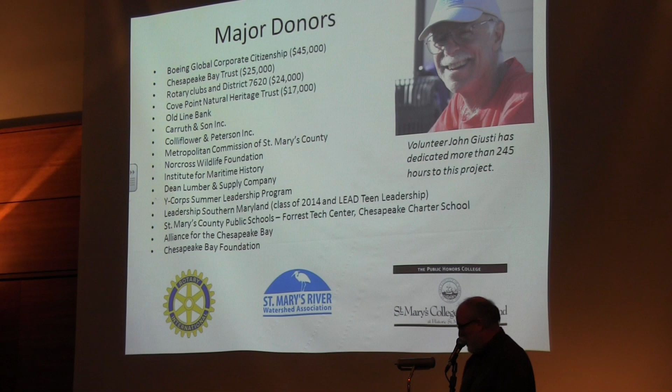Roy. Bob, you're doing a great job, outstanding. What I would like to ask you is, what mortality rate have you seen for your oysters?

Well, it's too early in our project to say much about mortality. I will say that when we go from the nursery tank out into the open river, we're looking at between 5 and 15% mortality. A lot of that has to do with how long we can leave them in the tank before we move them.

Generally speaking, we do an exchange in the tank every week, so the oysters are about 5 days old at that time. When I say 5 days old, they're actually 2 weeks old when we introduce the larva, but they're 5 days of being attached to shell. They're little itty-bitty specks. Even with my glasses, I really can't see them, although my project director, Allison, would point them out, and I'd get my magnifying glass out, and they would be there.

So they're very, very vulnerable at that age. We find that if we can leave them in the tank for about 2 weeks, we can reduce that mortality of about 15% down to 5%, just by the timing of moving them out. If we leave them in there for 3 weeks, we're starting to see the mortality creep up again.